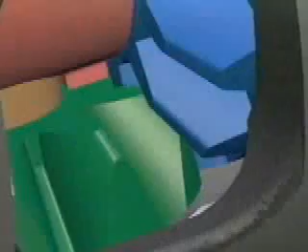At the heart of the Eaton locker is a beveled gear set, similar to the one in the conventional open differential. There are two pinions located on the cross shaft and two side gears splined to the axle. These gears are precision forged for high impact strength.

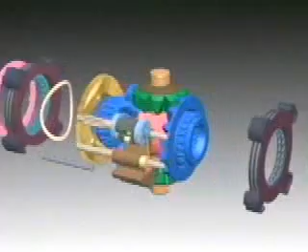One of the side gears has cam ramps machined on the back face of the gear. These ramps mate to corresponding ramps on the cam plate part. Also, there are 4 detent protrusions on the cam plate which mate to 4 holes in the side gear. This detent system prevents the cam plate from ramping until a predetermined torque is applied to the gear teeth.

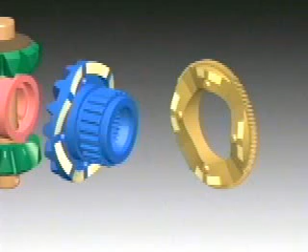After the cam plate has rotated out of the detents, the ramp surface on the cam plate engages the ramp surface on the side gear. As the cam rotates further, the ramps cause the cam plate to move in an axial direction. The ramps are symmetrical, so the same action occurs in both directions of rotation.

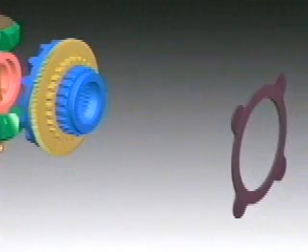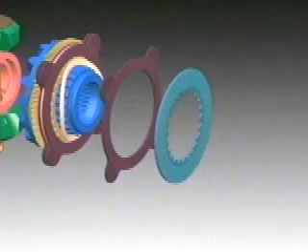Behind the cam plate is the active disc pack. Behind the cam plate hub is a wave spring that acts to keep the cam plate in the detent position. Following are more friction discs. Ear guides and snap rings are added to help align the parts in assembly.

On the other end of the differential, behind the opposite side gear, is another set of friction discs. The disc pack develops torque from the force created by the cam gear that is transferred through the reaction block at the center of the differential and into the disc pack through the side gear.

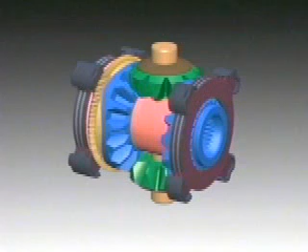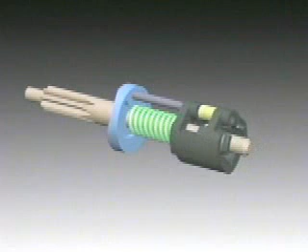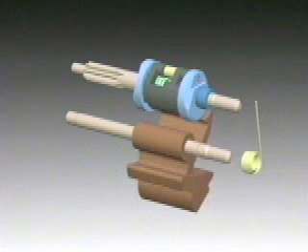The device that activates the cam plate is the engagement mechanism. It is connected to the cam plate by a small shaft that is geared to the cam plate. The mechanism is attached to the shaft through comb clutches and each end plate. The mechanism can rotate relative to the shaft when the torque between the shaft and the mechanism is greater than the comb clutch torque.

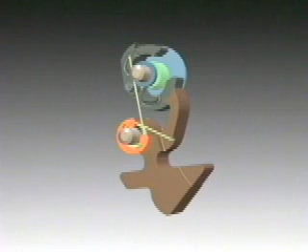The mechanism is made up of 2 flyweights that are spring-loaded toward the center of the shaft. The shaft rotates whenever there is a differential speed between the wheels. When the differential speed reaches 100 RPMs, there's enough centrifugal force on the flyweights to overcome the centering spring. The flyweights move outward to catch the pawl of the lockout mechanism. One flyweight engages the pawl in one direction of rotation, and one flyweight engages in the opposite direction.

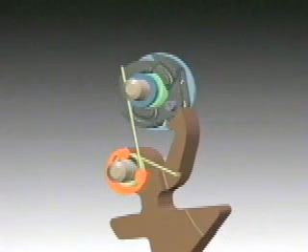If the vehicle is traveling over 20 miles per hour, the centrifugal force acting on the counterweight of the lockout mechanism will cause the engagement pawls to rotate away from the engagement mechanism. When this happens, the differential cannot lock up at high speed.

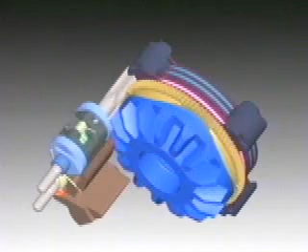With the parts back together, it can be seen how the parts work to cause lockup. With one wheel spinning, the cam side gear rotates relative to the case. This causes the engagement mechanism to rotate at a higher speed. At a given speed, the flyweights will swing out and engage the pawl on the lockout mechanism.

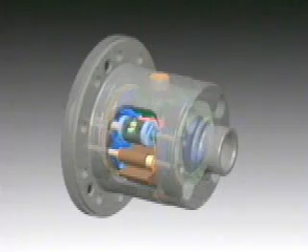This action creates a force to be exerted on the cam plate that causes it to rotate out of the detent position and into the ramping position. The active friction disc engages, which causes the cam to self-energize until enough torque is developed between the wheels to lock them together. With the wheels locked together, maximum driveline torque is available to the high traction wheel.